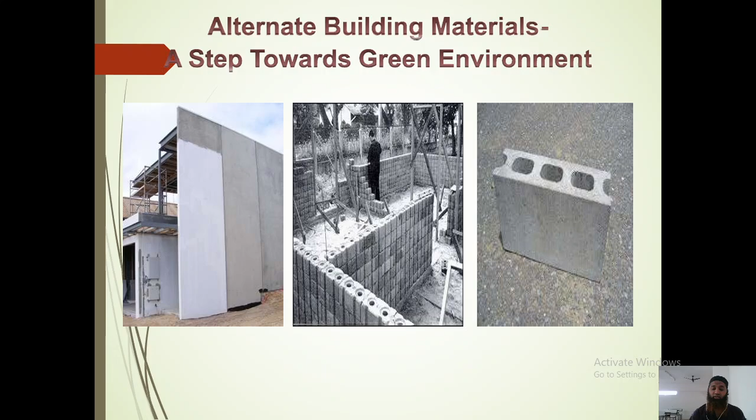Today we'll be seeing this topic, alternate building materials. What is the need for alternate building materials? We'll see that today. The demand for building materials has been continuously rising with the increasing need for housing both in rural and urban areas. With urbanization taking place, every human being wants a good shelter. If they live in a rural area, even there they want a good house. If he lives in a hut, he wants to go for a good house with RCC buildings.

So as these needs are growing day by day and increasing, the resources used to manufacture construction materials affect the environment by depleting natural resources, using energy, and releasing pollutants to land and water. As demand increases day by day, to manufacture these construction materials, the natural resources available to us are reducing day by day. To remove these natural resources and get them into the desired form and shape, we need to go through some process to get them as per our requirement. Thereby the usage of energy is also increasing, and the output is sometimes leading to pollution of land and water also.

The commercial exploitation of traditional building materials by various industries has aggravated the situation. Many big commercial setups have been coming up, because of which the depletion of natural resources is much higher compared to when the need was only for residential buildings. So what happens when natural resources are getting finished very quickly?

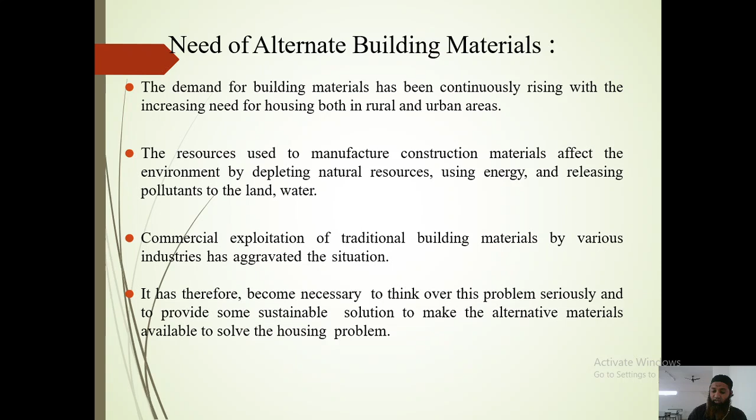Let us see the list of alternate building materials. We have hollow concrete block - we'll see all the details, advantages and disadvantages of this material. Fly ash bricks - fly ash is a byproduct of thermal power plants. Rice husk ash - the rice husk is the wastage after the rice is got, the husk removed from the top of the rice. Ferrocement - we'll see what is ferrocement. Tire veneer - this is the waste tire which can be used as alternate building material. Plastic wood - we'll see this also. Synthetic fiber, recycled aggregate, fly ash, and bamboo.

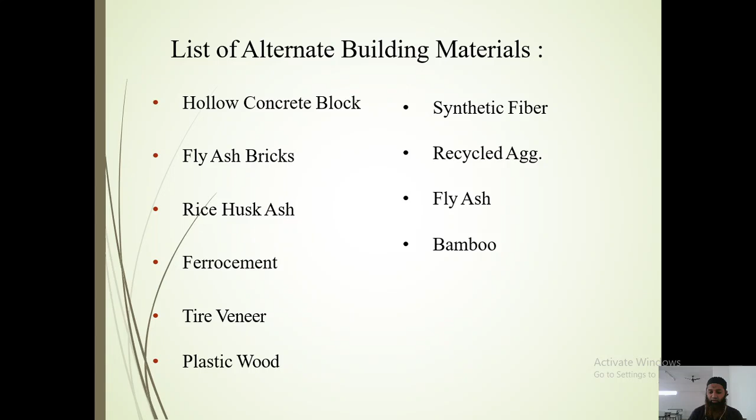Let us see all this now. Hollow concrete block - you must have seen this hollow concrete block. Let us see what is the use of this hollow concrete block and what are the advantages. Concrete block is primarily used as a building material in the construction of the wall, as this is a brick used for construction of the wall. It is sometimes called a concrete masonry unit, or CMU. It is one of the several precast concrete products used in construction. These bricks are already precasted as per the size and brought onto the site. Normally, they have very good strength and a very specific shape.

You must have seen with red bricks, normally when they are removed from the kiln and transported from one place to the desired place, the shape and size of these bricks are sometimes lost, and even the strength is reduced.

The term precast refers to the fact that the blocks are formed and hardened before they are brought to the job site. So basically, precast means they are already cast beforehand before getting to the construction site.

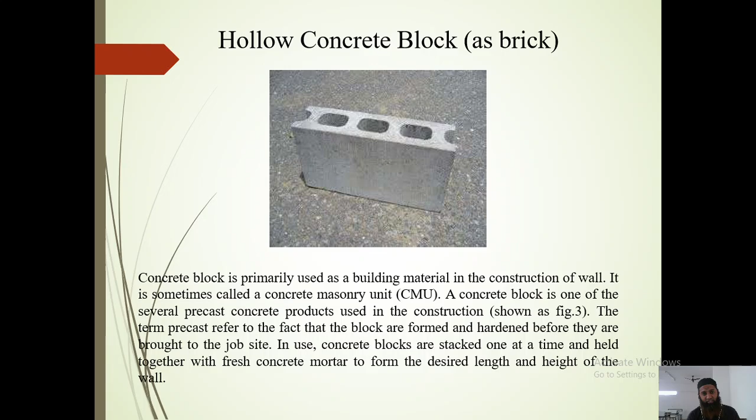In use, concrete blocks are stacked one at a time and held together with fresh concrete mortar to form the desired length and height of the wall. So basically, these are already made of concrete, and we put mortar to fix one brick to the other, thereby getting the desired result as we get with a red brick.

Let us see the advantages. It has very low maintenance, and the color and brilliance of the masonry withstands outdoor elements. It has very good color also. Normally the red brick is red in color, and over that we go for plastering. Here, as this is very smooth, we don't require that much quantity of materials, so material is also reduced with this brick.

It is load bearing, and strength can be specified as per the requirement. As I told you, just because it is precast, whatever strength we require we can make it as per our requirement. It is fire resistant also. You can see it is very thick, it can resist fire, and it won't break away due to the effect of fire.

It provides thermal and sound insulation also. So basically, when we construct a house, we want to see whether we have sound insulation as well as thermal insulation. Even this property is maintained by this concrete block.

The air in the hollow of the brick does not allow outside heat or cold into the house. Just because they are hollow concrete blocks, the outer air doesn't come inside and the inner air is not lost outside. Because of that, in summer these bricks are cooler, and in winter they are warmer. This is the purpose served by these hollow concrete blocks.

It is economical also, not too costly. The area it covers compared to red bricks is different, and it is economical. It is environment friendly also, since fly ash is used as one of the raw materials - we'll see what fly ash is in the later slides. So these are the advantages of using concrete blocks. You can imagine it has good strength, it is economical, and a lot of area can be covered because of this block.

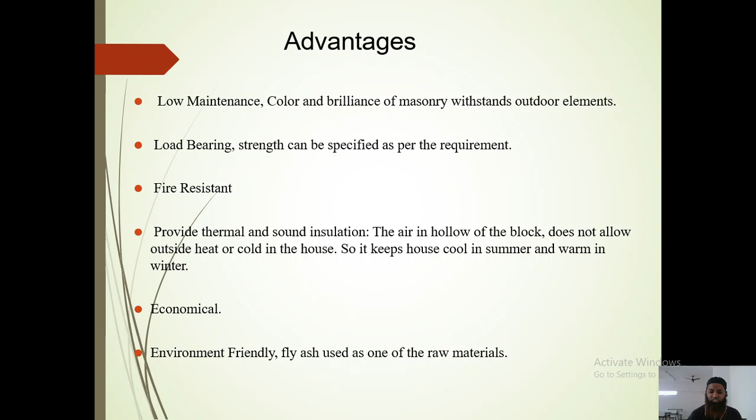When we go for plastering and finishing, just because the surface is smooth, we don't require a lot of material. Material can be saved to a very big extent here, and this is how we can save the construction cost also.

Let us see fly ash bricks. What is fly ash brick? Fly ash bricks are made of fly ash, lime, gypsum and sand. Now you might ask, what is fly ash? Fly ash is a byproduct of thermal power stations. A huge amount of coal is burnt, and because of that, when the coal is burnt, these thermal power plants generate energy and electricity, but the byproduct, the waste, is fly ash.

Since fly ash is produced in huge quantity, we want to come up with a solution where this fly ash can be used effectively. So these bricks can be extensively used in all building construction activities, similar to common burnt clay bricks, and they have the same strength.

Many experiments and tests have been done on this, and it has satisfied the proper requirements. So this is the fly ash bricks. The fly ash bricks are comparatively lighter in weight and stronger than common clay bricks. You can just see here, fly ash bricks are lighter as well as stronger.

We basically want to see what strength it can bear, and if it is lighter also, that is very good. So fly ash bricks are a very good alternate material we can use instead of red bricks, which are made using natural resources like red soil.

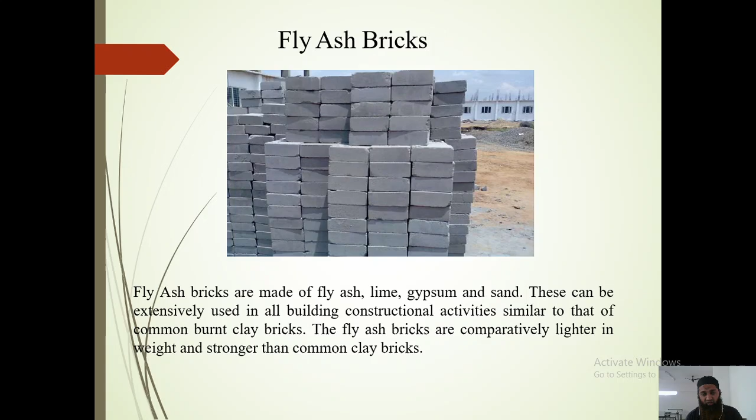Because it has a smooth surface, the material needed for plastering can be reduced. This translates into reduction in labor cost in laying each brick, which is quite substantial. Even the labor cost is reduced because of this fly ash bricks, since we don't require a lot of labor, as it is very lightweight and covers a lot of area.

Less water seepage and dampness in walls - the water seepage is also very less in this fly ash wall. Due to high strength and less water absorption of fly ash bricks, there is less water seepage and dampness in walls of building. Water can't seep into these fly ash bricks.

Less energy consumption - huge energy is consumed in heating clay bricks in kilns. By using fly ash bricks, much energy is saved in brick manufacturing. It doesn't require a lot of heating to get the desired strength - a little amount of heating can get us the desired brick. Whereas in red clay bricks, a huge amount of energy is required to heat the bricks before we can get the desired strength.

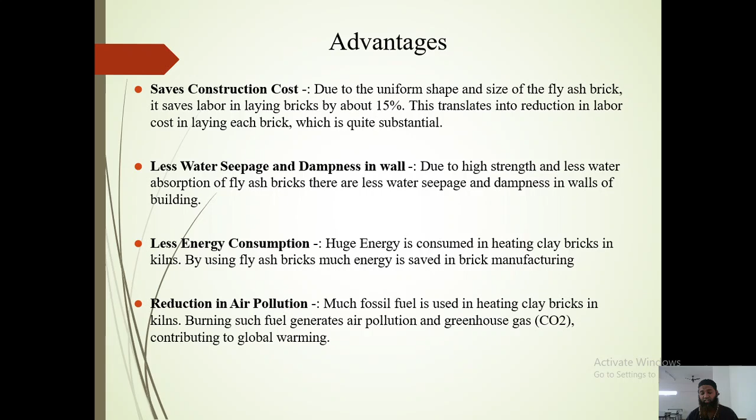A reduction in air pollution is also an advantage. Much fossil fuel is used in heating clay bricks in kilns, and burning such fuel generates air pollution and greenhouse gas. As the amount of energy needed to burn these bricks is reduced, it will naturally reduce air pollution too. Air pollution and greenhouse gases contributing to global warming can be reduced because of lesser heating of these bricks.

Let us see the next one - rice husk ash or pozzolanas. Pozzolanas are materials containing reactive silica or alumina, which in their own right have little binding ability. Now, if we want to use this product, it should have binding ability too. Rice husk is available in huge quantity, so we want to use this material rather than just throwing it away and increasing pollution - why not find a solution where rice husk can be used as a replacement for some material?

Yet when mixed with lime and water, it will set and harden like cement. So basically, our requirement is achieved because of the rice husk. They are important ingredients in alternative cement compounds.

Rice husks are a large byproduct - 1 ton is produced per 5 tons of rice paddies. From 5 tons of rice paddies, 1 ton of rice husk is obtained. You can just imagine what a huge amount of rice husk is available. Just by treating with lime and water, we can get the desired results, and it is estimated that 120 million tons of husk could be available annually on a global basis.

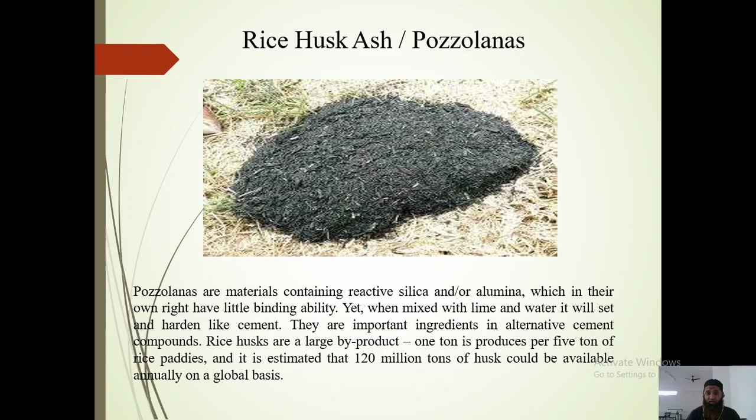Let us see the advantages. Increased compressive and flexural strengths. When cement is mixed with fine and coarse aggregates, it becomes concrete. In concrete, we check different tests - compressive test, flexural test, and split tensile test. Here the compressive and flexural strengths are increasing, which is a very good sign. It has a very good property.

It reduces permeability also, so water can't seep through it. This also has to be checked, and it shows good permeability performance.

Increased resistance to chemical attack also. Sometimes these materials are more exposed to water, and water contains different chemicals, causing chemical attacks. This can resist chemical attack. For example, if you've used this cement in a sewage line, the polluted water has different chemicals mixed in it. Because of that, the chemical reacts with the cement and these materials, causing deterioration. But this can resist this chemical attack.

It is very good - increased durability, with a very good life compared to other materials. It reduces effects of alkali silica reactivity. As mentioned, water is polluted with different things, and alkali silica reactivity also takes place, but this can reduce those effects.

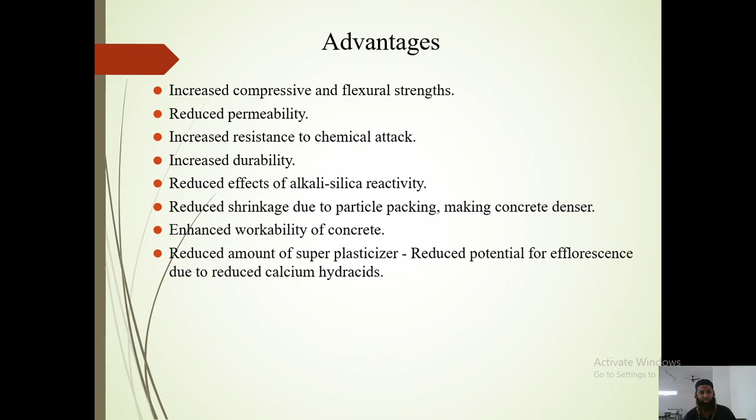It reduces the amount of superplasticizer needed, and reduces potential for efflorescence due to reduced calcium hydroxides. We use superplasticizers when concrete doesn't get good workability or doesn't reach the desired strength - under those conditions we increase workability and strength using superplasticizer. Because of good workability here, the amount of superplasticizer is reduced. This is a very good advantage - rice husk has very good potential, and we can do research on this.

Let us see what is ferrocement. The term ferrocement is most commonly applied to a mixture of Portland cement and sand reinforced with layers - Portland cement and sand reinforced with layers of woven or expanded steel mesh and closely spaced small diameter steel rods, rebar. So we have a steel mesh, and over this the concrete is laid in layers. It's a small steel mesh, but it has very good strength.

This is called ferrocement. It can be used to form relatively thin compound curved sheets to make hulls for boats, shell roofs, water tanks, etc. When used in house construction in developing countries, it provides better resistance to fire - because the steel mesh is already inside this cement concrete, you can say it's reinforced concrete. It has better resistance to fire, earthquake, and corrosion than traditional materials such as wood, adobe, and stone masonry, which can't resist earthquakes and sometimes fire.

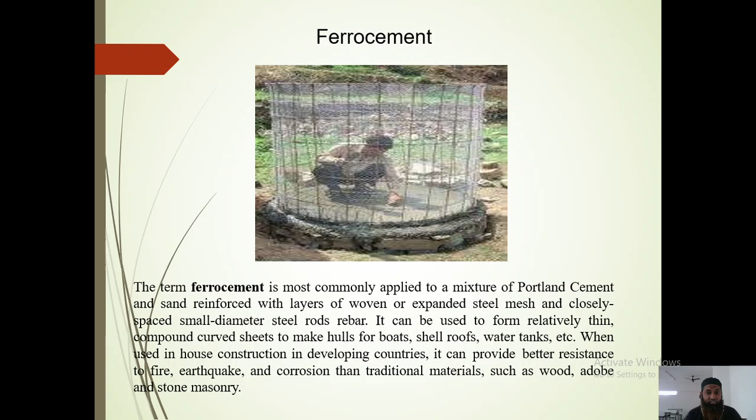It has good resistance to earthquake as well as fire. Let us see the other advantage.

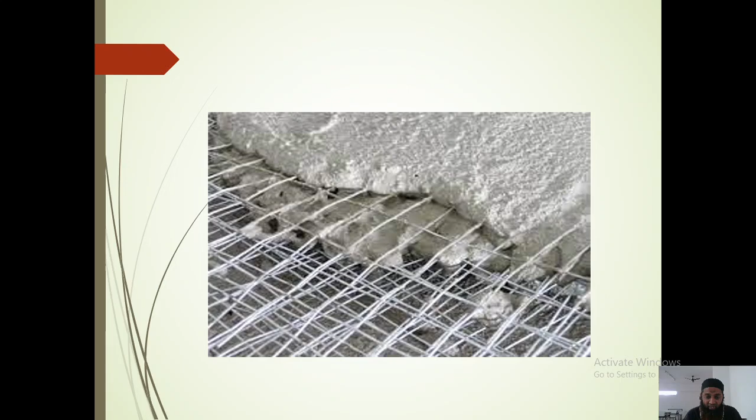This is ferrocement. You can see this steel mesh, and how the concrete, the cement mix with sand and fine aggregate, is poured into this steel mesh. You can see the layers: one steel mesh layer at the bottom, then the mix is laid, then another steel mesh layer is put in at the next level, and again the material is poured. So this is ferrocement.

You can see the advantages. It has low construction material cost. Ferrocement construction normally has the lowest material cost compared to other materials, where we try to reduce the use of natural resources. Typically, the material cost in ferrocement is about 30 to 50% of that for steel, so the cost is significantly reduced because it still achieves the required strength.

Low ongoing maintenance. With proper design and construction, ferrocement vessels require only minimal ongoing maintenance, very less compared to other materials which require a lot of maintenance.

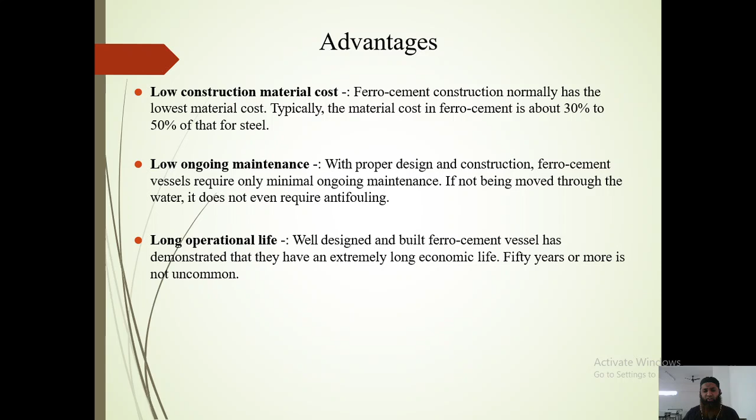You can see long operational life, and durability is very good. A well designed and built ferrocement vessel has demonstrated an extremely long economic life, 50 years or more is not uncommon. So we don't need to worry when ferrocement is used, it has good life also.

Let us see tire veneer as flooring material. Basically, what is tire veneer? Rubber tires play an essential role in modern life, and we keep using them. The automobile industry is growing day by day because the demand for people moving from one place to another is increasing, and people want good luxury too. So the demand for automobiles is increasing, and with it, rubber tires are used globally at all levels of development, so tire requirement is increasing day by day.

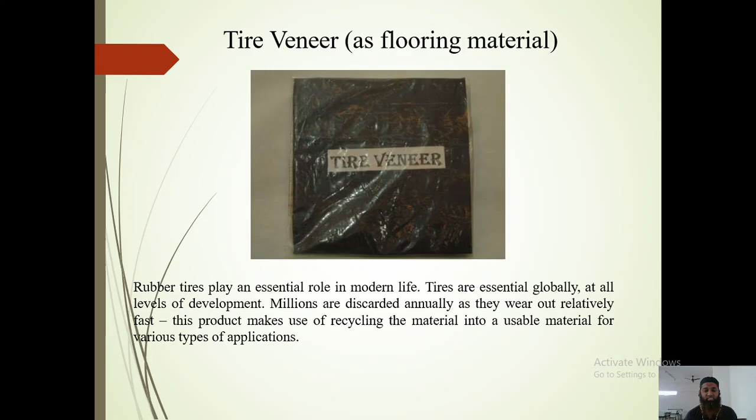Millions of tires are discarded annually as they wear out relatively fast. You must have seen that within 2 or 3 years, tires wear out and need replacing. But what about the tire that's no longer of use? Where do we throw it? Why waste it? So we have come up with a solution where this tire can be used as a flooring material. This product makes use of recycling the material into usable material for various applications, so it can be reused in different applications.

Let us see the advantages. It is an environmentally responsive flooring material, resilient both indoors and outdoors. This flooring material, tire veneer, can be used in areas such as sports and recreation, animal housing, and high traffic areas outdoors. You can see where it can be used: sports areas, recreation centers, places where animals are housed, and high traffic areas.

A variety of other products can also be made, such as vibration dampeners and furniture surfaces internally. These dampeners are used in places with high chances of earthquakes, so this material can be used there too, as well as for furniture surfaces internally.

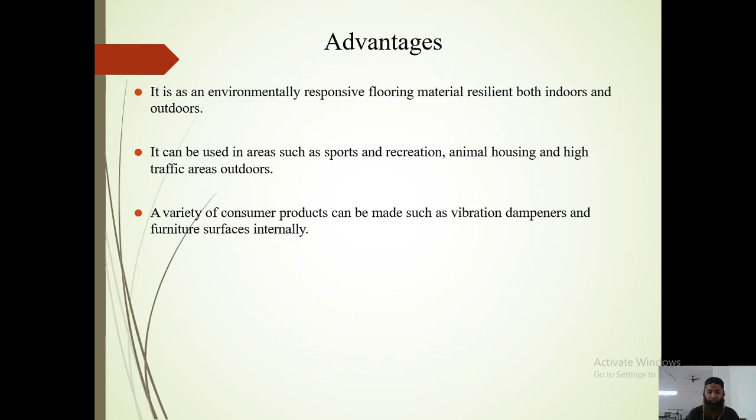Let us see what is plastic wood. It was made primarily from high density polyethylene, HDPE, pipes. You must have seen these thick black pipes used for water requirements, or this plastic used for making drums that contain different chemicals. This HDPE is recovered from the waste stream, mainly in the form of used milk containers or recovered plastic. You must have seen thick containers of milk made from this material.

So you can see that the plastic being used is HDPE plastic, and from wood waste that has been ground to a fine powder. What we do is take this plastic and grind it to fine fiber. First it's cut into small sizes, then ground into fine fiber. After that, what do we do?

A 50-50 mixture of plastic and wood is common. So what we do is mix a little amount of wood, 50% and 50% of this shredded plastic. This is mixed together, 50-50%. Plastic wood is 100% recyclable material, recycled plastic.

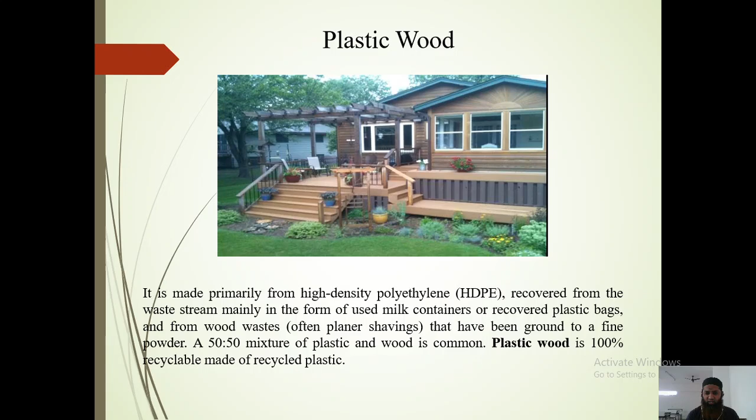You must have seen that a lot of plastic is available. So this HDPE plastic can be used here in the construction industry also. See, it is 100% resistant to rot. Termites or other different things can't rot it, so it is 100% resistant to that.

Impervious to cracking and splitting - it doesn't crack or split if installed correctly. Environmentally friendly and requires less maintenance. If we don't use it, this plastic can pollute the area and increase pollution. Waste plastic and wood is used for manufacturing. See, this is used for manufacturing also. It is a very good recycled waste.

All woods may check, split, cup, crook, twist, and warp, and weather over time to a grayish color - see, all this can happen with wood. But treated wood exhibits long-term durability. If the wood is treated, it can exhibit long-term durability in a deck surface application, lasting as long or longer than natural durable untreated wood. See, if this wood is treated with this plastic, the durability is also increased.

So this plastic wood, as I told you, is 50% plastic and 50% wood mixed, and they can be used as a good flooring material.

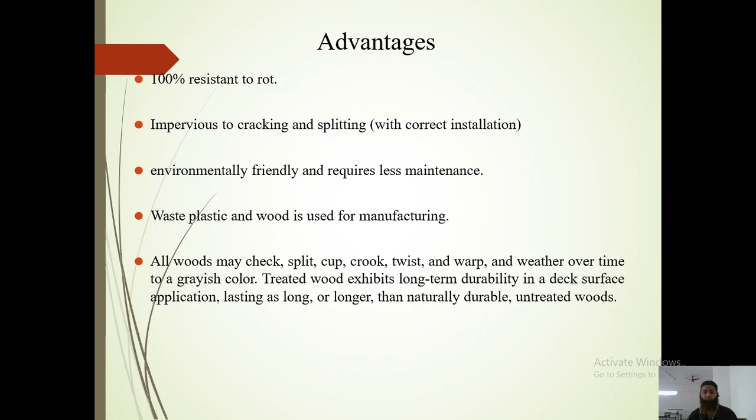Let us see what is reinforced fiber concrete. Reinforced basically means we are increasing its strength by putting fibers. Just as reinforced cement concrete means we are enforcing the strength in the cement concrete, the same way reinforced fiber concrete means we are reinforcing the strength by putting fiber into it. Fiber reinforced concrete is concrete containing fibrous material which increases its structural integrity.

You can see here the structural integrity is also increasing. When we use this fiber material, the amount of steel percentage can be reduced, as the strength we need can be achieved by this fiber concrete. It contains short discrete fibers that are uniformly distributed and randomly oriented - basically they are small wires, very small in size with a very small diameter, cut to size in millimeters.

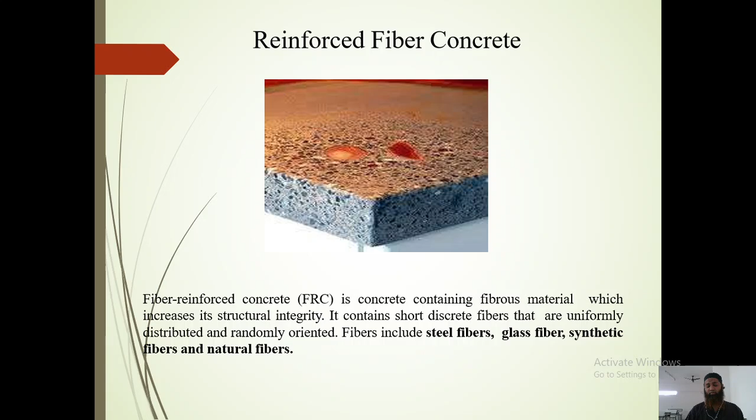Fiber includes steel fibers, glass fiber, synthetic fiber, and natural fibers. See, steel fibers are small wires like in a mesh. How do we get glass fibers? Small sizes of glass are cut. Synthetic fiber, natural fibers like bamboo fibers - you have naturally available things that are made into fibers by treating them. So reinforced fiber concrete can be used, and they give the proper strength as required.

Advantages: improved resistance to explosive spalling in case of severe fire. If severe fire takes place, what happens is the cement comes off from the concrete, from your structural elements. So this provides very good resistance here to fire, extreme fire.

Improves impact resistance. If there is sudden impact, it gives good resistance in those conditions also. Sudden impact sometimes happens due to accidental loading or some accident, causing a huge amount of impact. Even that can be resisted here.

Increase resistance to plastic shrinkage during curing. What happens when curing is done is there is shrinkage which takes place. Even this is resisted by using this material, fiber reinforced concrete.

Improves structural strength, as I told you, because of using this fiber, and reduces crack widths and controls the crack widths tightly, thus improving durability. Now what happens when cracks take place? Those cracks are taken up by these fibers, thereby you won't see cracks in the structural elements where these steel fibers or other fibers are being used.

It reduces steel reinforcement requirements - as I told you, when we increase the steel fiber, the main steel and distribution steel can be reduced here. It also improves ductility.

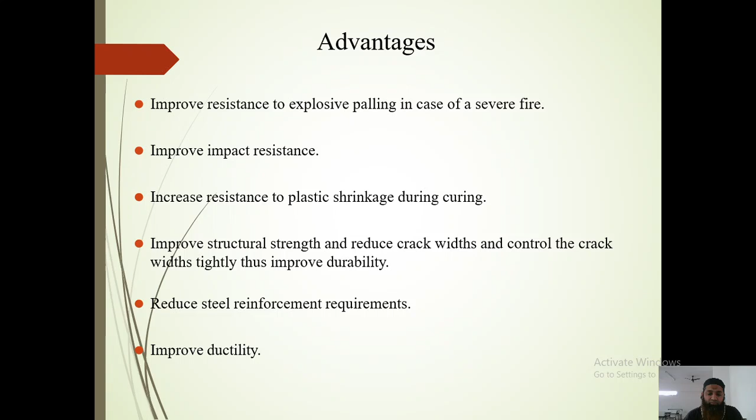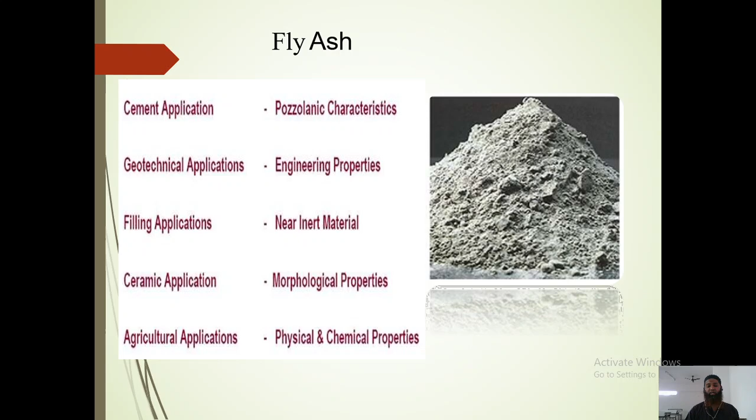It provides good strength to the structural member. You can see fly ash and its various applications: cement applications using fly ash, geotechnical applications, ground excavations, filling applications where gaps need grouting, ceramic applications where gaps around tiles can be filled, and agricultural applications. Now let's look at the advantages of fly ash.

It saves construction cost, which is reduced to a huge extent. It also reduces air pollution, since the burning of kilns is not needed to that amount compared to red bricks, so air pollution is reduced.

Good compaction can also take place. It has a high range of optimum moisture content. There is also a high internal angle of friction, good internal angle of friction, and because of that the binding is very good.

It is free draining with less interruption due to rain, so it can drain out very easily. There are no large lumps to be broken, unlike cement where you sometimes get lumps, so it is easy to spread. It is also light in weight, which is very beneficial, and can be used for weak subgrades.

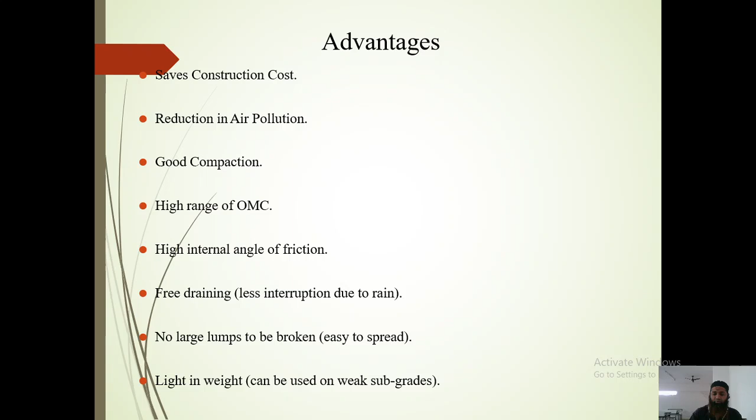Let us now see other solutions where we try to come up with alternate materials that can be used, thereby lowering the use of natural resources.

In a rural house we can use fly ash brick because it is cheaply available and provides more strength. We can also use mud plaster because it can resist temperature variation with tensile property, so mud can be used as a plaster in rural houses.

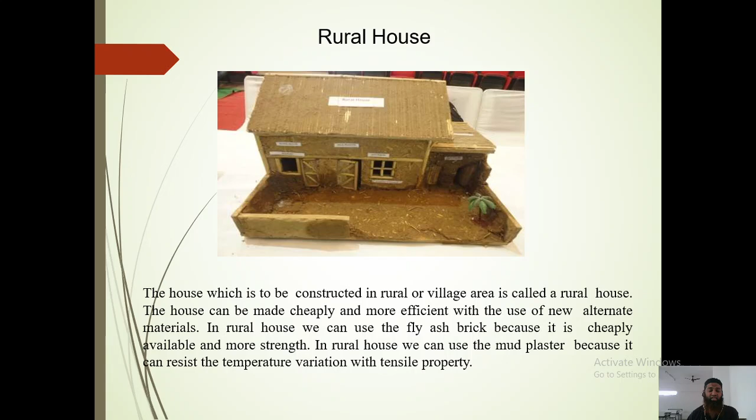Plastering can easily be done with the help of mud. The construction of such a house is very cheap, whereas in urban areas construction cost is very high. You wouldn't normally see this type of construction in urban areas, though it is your choice; it is seen only in rural areas because the construction cost is cheap.

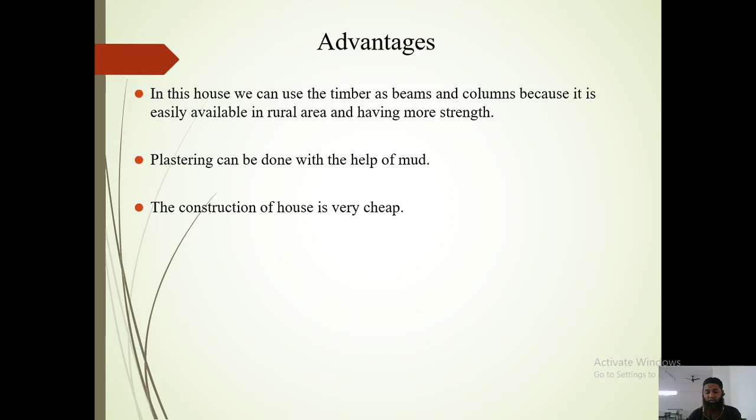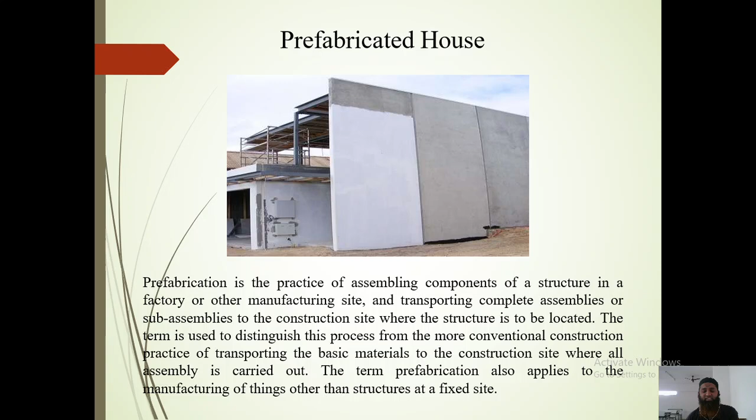You can see a prefabricated house. Basically, what is prefabrication? It is where materials required are prefabricated in an industry as per our size and shape and requirement, then brought to the site and fixed there. Thereby we have precast columns, precast beams, and precast walls also. The term prefabrication also applies to manufacturing things other than structures at a fixed site; whatever we require, we can manufacture and bring to the site.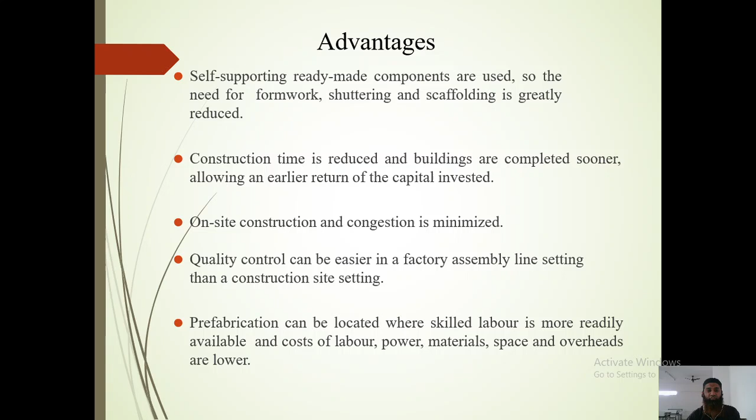On-site construction congestion is minimized. Quality can be ensured easier in a factory assembly line setting than a construction site setting. Prefabrication can be located where skilled labor is more readily available, and cost of labor, power, materials, space and overheads are lower. So all these are the advantages in this type of construction. You can see a continued advantage in prefabricated construction.

Time spent in bad weather or hazardous environments at the construction site is minimized. If there is bad weather, normally what happens is we stop the construction. But here, as these are being manufactured in the industry, we don't need to stop the construction work.

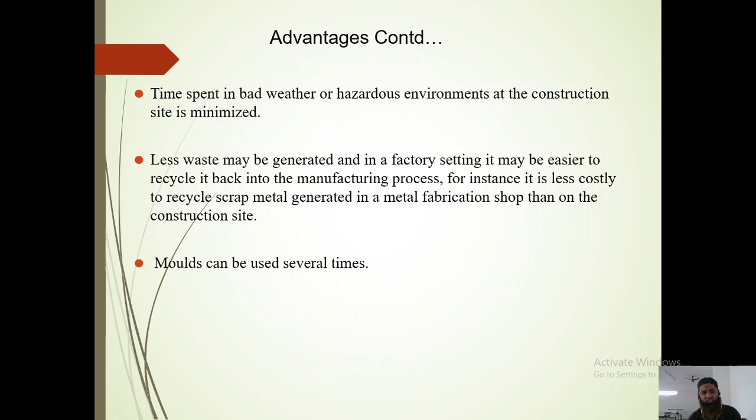Less waste may be generated, and in a factory setting it may be easier to recycle it back into the manufacturing process. For instance, it is less costly to recycle scrap metal generated in a metal fabrication shop than on the construction site. You can see it can be recycled, and this fabrication can be used furthermore also. Molds can be used several times; once we make the molds, those molds can be used again. You can just see a cost reduction area here.

Let us see the cost reduction areas. What are the cost reduction areas? There are different methods from which cost can be reduced. We need to see this aspect also, where the cost can be reduced. It is not that only alternate materials are being used and thereby the cost is getting increased. We need to see where we can reduce the cost of construction also, giving the same advantage of strength while we reduce the cost. The strength is not being compromised, but only the cost is being reduced. Let us see some of them.

What are they? Plinth, walling, doors and windows, and lintel. Basically, plinth beam is raised and walls are raised, doors and windows are needed, and lintel is also needed. Let us see what we can do here.

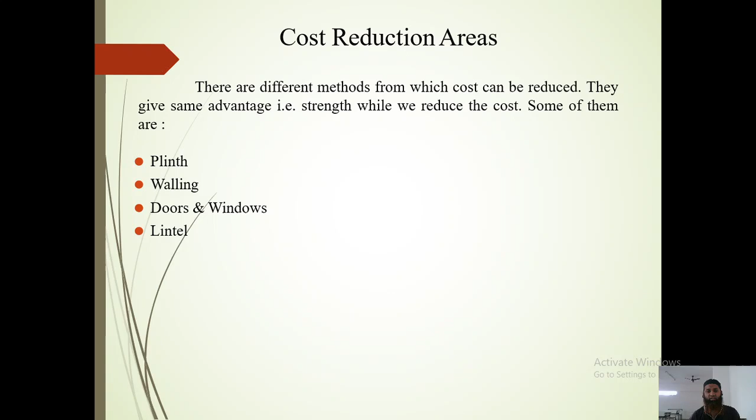Plinth: it is suggested to adopt 1 feet height above ground level for the plinth, and it may be constructed with cement mortar of 1 is to 6 ratio. The plinth slab of 4 to 6 inches, which is normally adopted, can be avoided, and in its place, brick on edge can be used for reducing cost.

Normally, in plinth beam we put CC, cement concrete, in place of the plinth. There, what we can do is reduce this and use bricks also in place of this plinth beam material. By adopting this procedure, cost of plinth foundation can be reduced by about 35 to 50%. We can see the amount of construction cost is reduced to 35 to 50%, where we are not using the same material and not using that size of material of 4 to 6 inches. Rather, we are just changing the material using brick, providing a good plinth also, where we are not compromising with the strength part.

Walling: in view of high energy consumption by burnt brick, it is suggested to use concrete block, which consumes only about one third of the energy of burnt bricks in its production. And wall thickness can be reduced from 20 centimeters to 15 centimeters. If concrete blocks are used, as seen in the previous slides, the amount of energy to burn them is reduced about one third. Even the thickness can be reduced; with red brick, the thickness is about 20 centimeters, but here we can reduce the thickness to 15 centimeters.

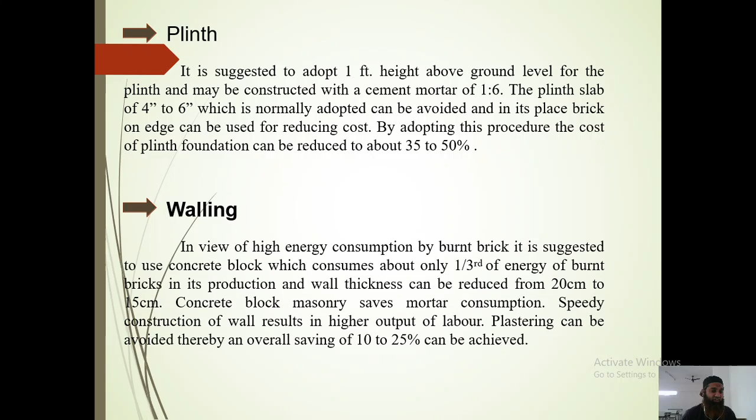Plastering also can be avoided here because it has a very good smooth finish, and thereby 10 to 25% of overall saving can be achieved here.

Let us see for doors and windows what we need to do. It is suggested not to use wood for doors and windows, and in its place concrete or steel section frames can be used for achieving savings in cost up to 30 to 40%. We need to come up with alternate solutions to reduce reliance on natural resources, so we can use steel sections or concrete frames. Normally frames are made in wood, but here we can try to make those frames in concrete, and doors and windows can be made in steel frames.

Similarly for shutters, commercially available block boards, fiber or wooden practical boards, etc. shall be used for reducing the cost. Even wooden practical boards and other block boards can be used, thereby the cost can be reduced by 25%.

Lintels - where do we provide the lintels? The traditional RCC lintels, which are costly, can be replaced by brick arches for small spans and save construction cost up to 30 to 40% over the traditional method of construction. These lintels are placed where we construct a door or a window, where the whole load of the wall above the door and window is resisted by this lintel.

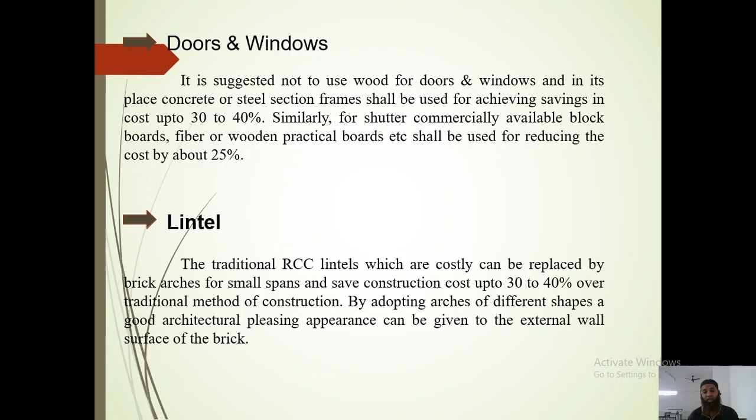So rather than constructing a door with a lintel, why don't we give an arch? In an arch, the whole load can be distributed across different bricks, and the weight is reduced, and also the cost is reduced by making this construction into an arch type. By adopting arches of different shapes, a good architectural pleasing appearance can be given to the external wall surface of the brick, so you get a very good appearance and a good finish can be achieved here.

So these are what we can see. Let us see the conclusion - by using these different other materials, what do we conclude?

The demand for building materials has been continuously rising with the increasing need for housing both in rural and urban areas. As I have told you, the demand is increasing day by day. Everyone's needs have changed nowadays - everyone wants to have their own good home or house. Thereby construction is increasing day by day, which is simultaneously giving a big jolt to the natural resources available also.

Selecting environmentally attractive materials with reduced environmental impacts is primarily achieved through the practice of resource conservation and selection of non-toxic materials. So basically, we want to come up with materials which are non-toxic, where they don't increase pollution, rather they decrease the pollution. So we have to take up materials which are non-toxic.

The resources used to manufacture construction materials affect the environment by depleting natural resources. As we had seen just before, if you have fly ash or different materials, the construction cost is also increasing, and the natural resources such as energy are also increasing. Thereby the natural resources are getting reduced here.

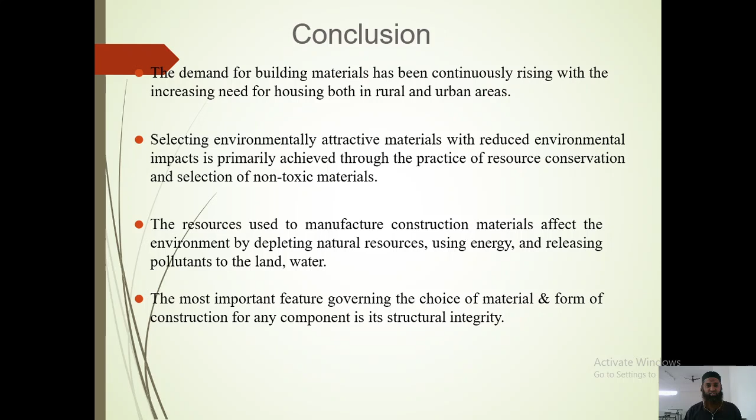The most important feature governing the choice of material and form of construction for any component is its structural integrity. With these different materials we have seen, using them increases structural integrity also. Thereby using these different materials we can achieve desired results and desired strength, and everything can be achieved. So we have followed these principles also, where there are 4 E's.

It should be efficient also - the efficiency should be good, it should give us good results, good outputs. Economical - it shouldn't be too costly also. Energy conservative - we should try to reduce the consumption of energy also, so even this should be seen. Eco-friendly also, it should be eco-friendly also, and it should be easily available also.

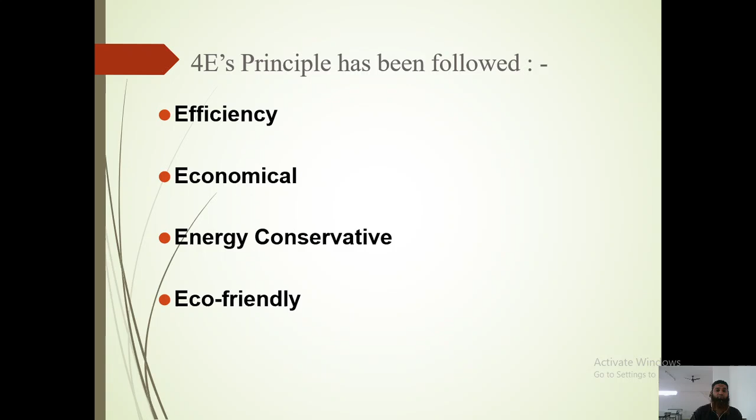Thus, the discussed facts clearly state a wide and promising scope of alternate building materials in the construction industry. You can see here how different alternate building materials can be used in this construction industry, thereby reducing the use of natural resources available with us. If we don't use these alternate building materials, then a day will come where we won't have natural resources available with us.